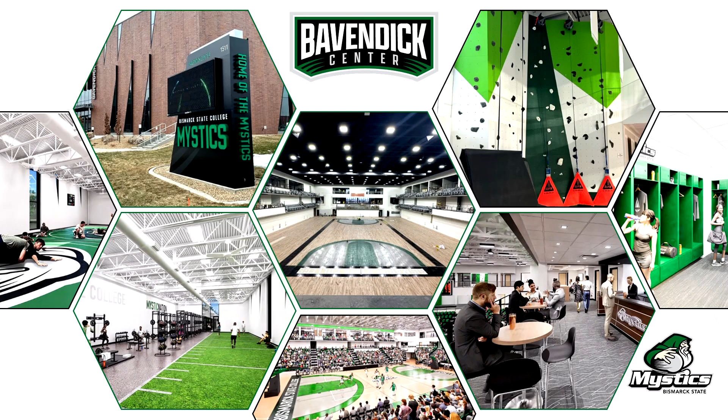So when you look at some of the images for this, and I hope this comes through to our viewers online well enough, some of these are renderings. What you see on the left side of the screen is the wrestling room, which will have two full-size wrestling mats in for the training.

Going counterclockwise, the facility for working out will have not only the weights and training equipment, but also a turf indoor track where athletes can do sprints and groundwork. That'll be something for our track athletes during indoor season, as weather can be an issue in this city and community, if you haven't heard that before.

At the six o'clock of this screen, you can see a rendition of what the arena will look like in a basketball setting. As I mentioned before, 2,000 seating. This is going to bring an environment that is not super large, but good for a lot of our events.

You hear a lot of times, especially out east in Fargo, when some of these events are held in large arenas, it just seems so big and so empty. So this is what we thought is a great size for a very energetic environment, but also we want to put good competition on that floor as well, with our student athletes competing at that highest level.

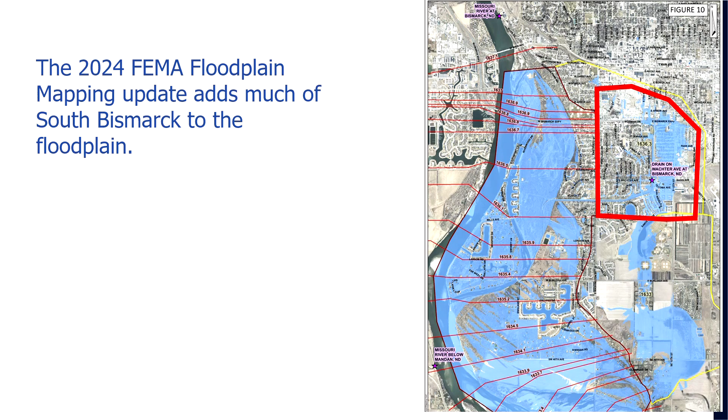So as a refresher, this is the crash course highlights, Cliff Notes version. You guys have seen it before, but just to refresh everyone's memory, in 2024 FEMA updated the floodplain mapping in South Bismarck in particular, but really throughout Bismarck. In South Bismarck, we added about 950 structures to the flood map.

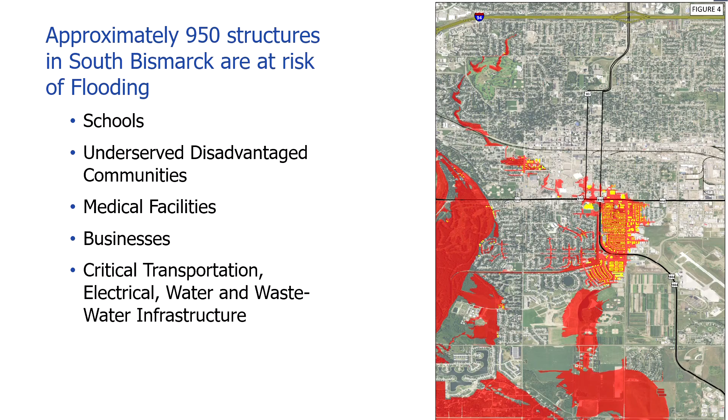And those structures, as you see here in the list, are a variety of types, some single-family homes, some schools, some infrastructure facilities. If that structure is backed by a federal mortgage, it is now required to pay flood insurance for that structure indefinitely, until the floodplain changes, either through an infrastructure improvement like we're trying to do, or through some other manner.

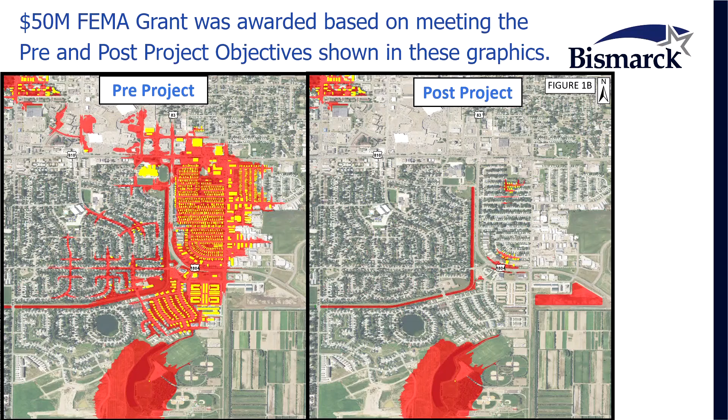Thankfully, the City of Bismarck was awarded a $50 million grant through FEMA to remove many of these properties from the floodplain through some of the improvements we noted. The picture on the left is what the floodplain looks like now, our effective floodplain as of 2024. The picture on the right is what we were shooting for when we applied for that grant money with FEMA. The initial alternative we developed was a concept that looked like this, with focuses on... let me get the highlighter here.

All of our improvements will have something on the South Washington gate structure where the South Bismarck drainage ditch crosses South Washington Street. This particular improvement had a stormwater pond on some airport property, interconnected to the storm sewer system to create effectively one large pond that would hold back water during a flood event, and then a pump station would pump that water out while the gate was closed.

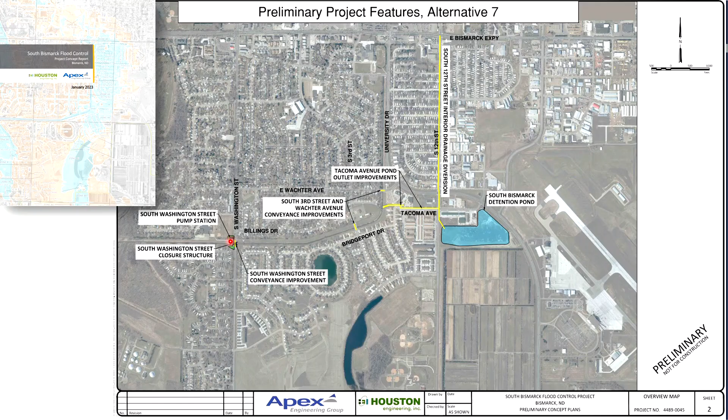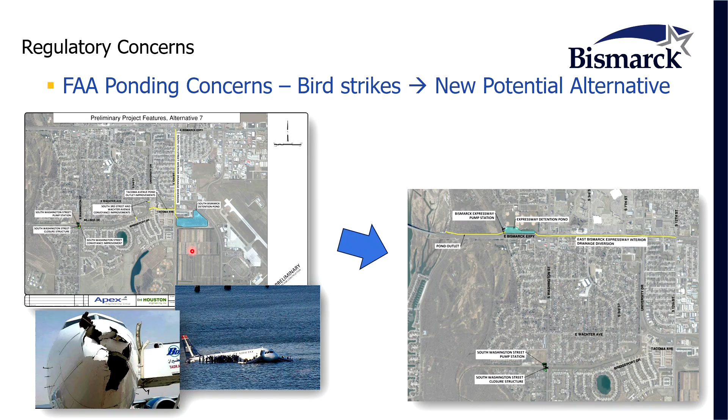As we continued our coordination with partners at the FAA and at the state level with the Bismarck Airport, there were concerns about bird strikes, or the ability for a bird to strike an airplane. So that's why we pivoted at that time to the Bismarck Expressway option, shown on the right hand of the screen. My next slide will get into more details about what that option entailed.

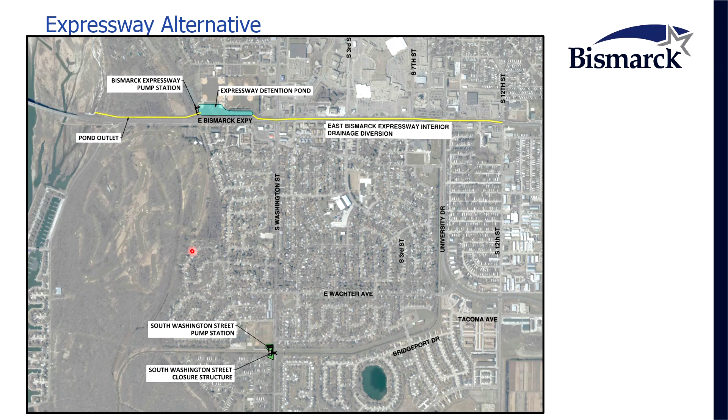This is pretty much the time at which we as the city started engaging with you as the park board, because we saw impacts would be in Clem Kelly. We initially looked at some ponds within Clem Kelly. Eventually we were able to come to an alternative that increased the sizes of the pipes along Expressway to minimize the impacts to Clem Kelly, but that all comes with a cost, so that cost was allocated there.

The last time I spoke to you would have been last April, where we said we found a solution that would still need some land from the Park District, but we'd be able to push much of that infrastructure to the south side of Park District property and have only a temporary impact during construction. Once that improvement is done, we'd be out of your hair and can put grass back on top of whatever that infrastructure looks like.

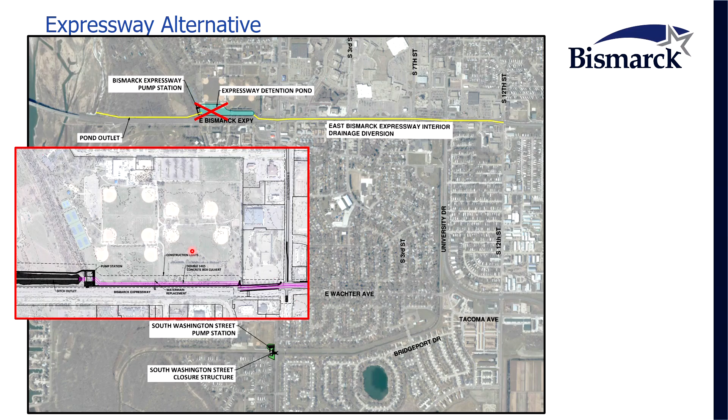So the activities since then would have been the final touches of the North Dakota legislative process. We worked with the North Dakota legislature to secure some funding for this improvement.

Since session ended, we've also had a lot of coordination, particularly with the North Dakota Department of Transportation. Bismarck Expressway is their corridor, so we started coordinating with them on what their expectations are if we put this large pipe or large conduit in their right-of-way, what they will need to do, and what rules they need to follow.

As we've had every conversation with someone, no one really said, here's something cheaper that we found. It's always more expensive—here's another thing we have to add to the budget. We take that into account with as many contingencies as we can when planning, but as we start eating into those contingencies, we're now just adding real costs on top of what we were planning for.

The same could be said for some of the adjacent private landowners. As we looked at ways to minimize costs and impacts to the traveling public, we could put some of those improvements on, let's say, the Kirkwood Mall parking lot or the Eide Ford parking lot, and those negotiations were good—everyone was willing to work with us. But when it comes to things like moving a sign, those things have costs. So things we might do to lessen the public impact might increase the project cost in order to do so.

Lastly, there's been a lot of coordination with our state and federal regulatory agencies, both from a regulatory perspective and a funding perspective—many doing double duty in that way. The North Dakota Department of Water Resources administers funding through the state, along with the State Water Commission, so we're working closely with their staff to understand what's eligible in their cost share formulas, as well as taking their feedback to heart in terms of how these alternatives fit into their funding systems.

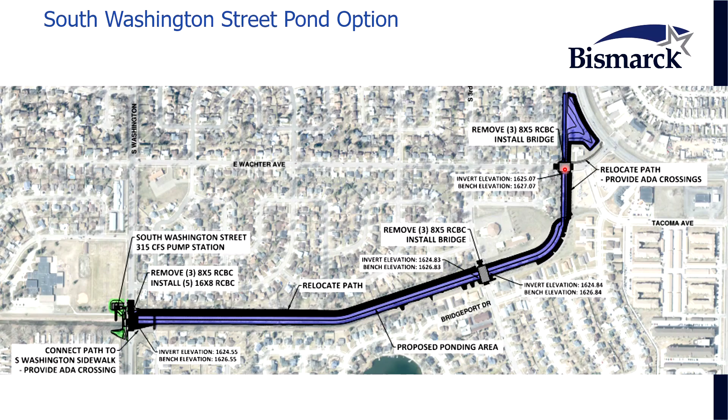When I say improving the capacity, I mean removing the box culverts that are there and replacing them with bridges, most likely, so that we can have one really large pond with great conveyance between all the reaches of this facility, which can then make that pump station as efficient as possible to move that water out of there.

Hopefully this comes across. I might zoom in to these ones here.

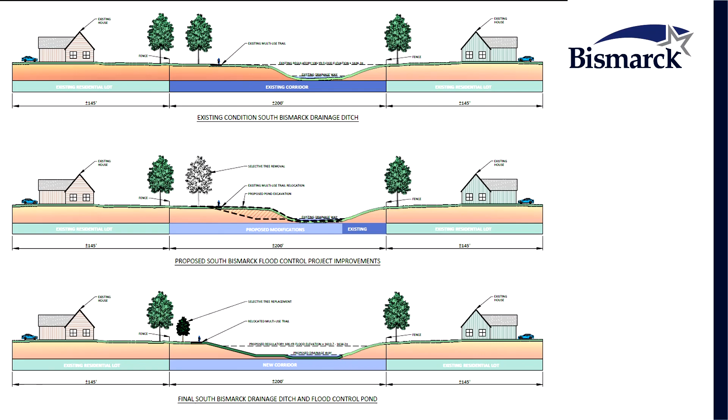So this next slide is a series of typical sections showing what that cross-section looks like of the existing corridor. We're showing that 200-foot wide piece of land that the city owns, some trees on the north side, the trail on the north side, and then the existing drainage way shown there, more so on the south side of the corridor.

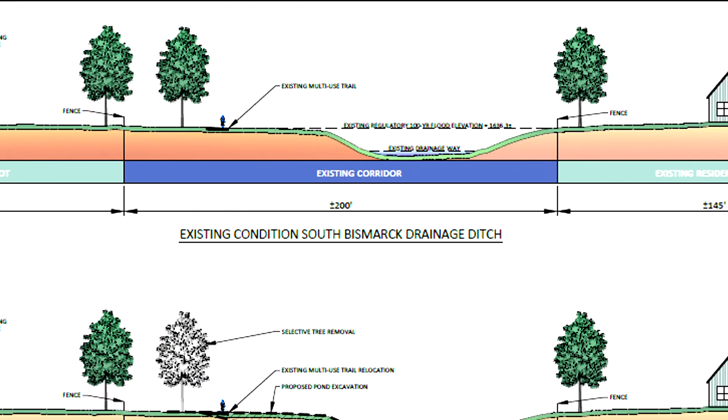What we'll find during our proposed conditions is we'll go out and excavate that north portion of it. We'll keep the bottom of the ditch the way it is. We're really not changing the elevations of anything. We're just adding capacity and storage, that's what we're trying to do with this improvement.

But in doing so, there would be trees that would be impacted, because we'll be looking at all of this in order to find that Goldilocks moment of impacts, of what we can take out without taking out a tree unnecessarily. There could be tree impacts as well as impacts to the existing multi-use trail that's there. That's another thing being considered, whether we would impact the trail or just grade right up to it. It's still something we're trying to figure out.

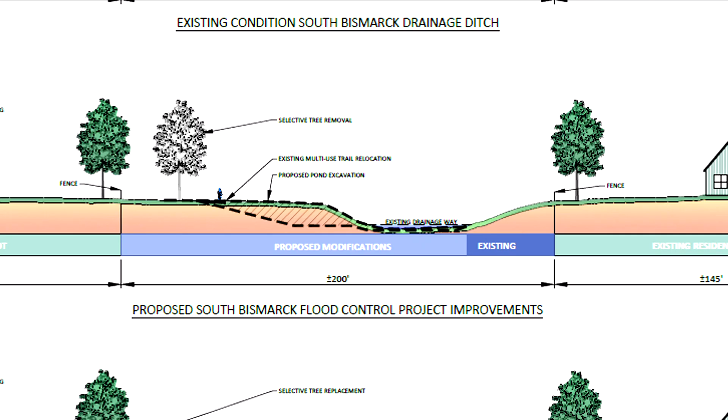If the trail was impacted, we would be restoring it, further north 5 feet, 10 feet, whatever it might be. And regardless of whether it's impacted or not during construction, it would likely be closed, even if the pavement itself is fine, since that'll be the middle of the construction zone during that time.

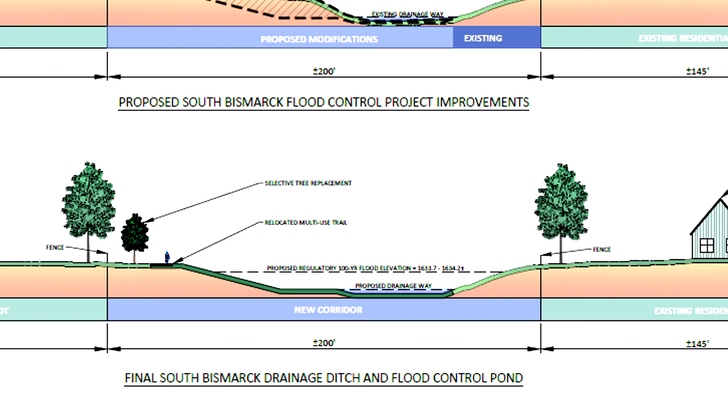And when we are done, we would expect something that looks like this. Still no right-of-way acquisition required from the adjacent properties, no impacts to any of the trees or anything outside of the city's property, but the trail will be reestablished. We put a tree in there, smaller this time around, because we recognize any mature tree that's out there, we're not going to be putting back a 40-foot cottonwood. We'll be putting back a smaller one that will grow to be that into the future. And we will have a lower regulatory floodplain by 2 or so feet with this improvement, which is what we're ultimately aiming for.

We would be replacing the triple cell with something that has 5 cells wide, so we're improving once again the conveyance through there, and putting a closure structure at this location so that when it is flooding and the river is at a high elevation, we're able to close those gates but not flood ourselves out from the interior. If we have a rain event during a flood stage, we're able to use these pumps to evacuate the water and pump it out from the ditch onto the high side or the river side during that event.

I do want to note a couple of comments, and this is where we'll focus on our impacts as it relates to parks facilities.

So we recognize that moving the north side of the embankment through here would have impacts to the existing trail or the bridge that crosses the creek, or the drainage ditch at that location. We are still evaluating what it would look like to replace that bridge outright, or modify the bridge just to add length to it so that it can stay in its location but have a longer span, because now that north side will need to expand another 30 feet or whatever that length might look like.

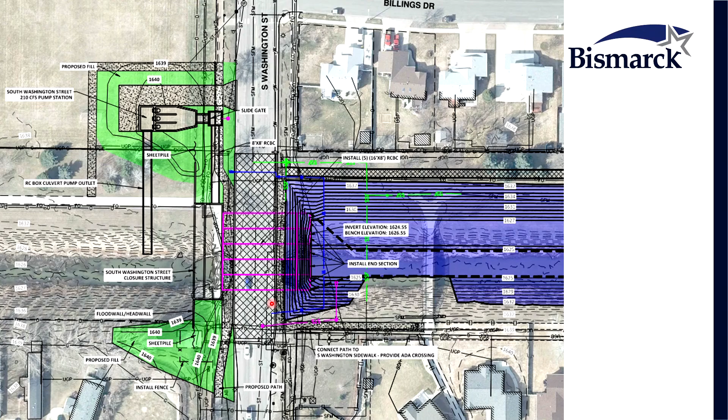Are there other locations, other drainage ways, other park district property, or even city property that could use a bridge of that length, that could be implemented or integrated somewhere else into the community so it's not just scrapped or salvaged that way. So that is something we'll continue to work with your park district staff on, potential options there, and I guess it'll be at their discretion, at your discretion, to figure out how much of those types of decisions come back to you as a board and how much are more at a staff level on some of these issues.

So my last slide on costs is that thankfully, with all these changes, we do see dramatic cost savings in doing it this way.

So we're not seeing the improvements. If you're driving on Bismarck Expressway, when we're looking at some of our models, the rain will go up to the same elevation that you see today. It might only be there for 1 hour instead of 2 hours.

So there'll still be an impact and a benefit to the public. But if we get done with this project and the public says it's still flooding on Expressway, we'll have a large amount of public information to explain what this project will do and won't do. Even though we might build this huge thing and get all these properties out of the floodplain, there's always a bigger event and always a stormwater event that would cause flooding in a street. That's just how Bismarck is, and that's how every community is. You can never build it big enough to take care of all your problems, or else it's financially consequential.

So our new cost estimates show we'd still see that $50 million from FEMA. We would be back to the state with now a $10 million, or a little north of $10 million, request per the typical funding patterns the state can employ at the next session, leaving a $20 million local cost for the city of Bismarck to fund locally.

So our next steps, at least the next couple months of work: we're working diligently now on our 30% design. Now that we know what we want to do and what it's going to look like, we can get into more of the nuts and bolts of those plan sets and plan sheets and better cost estimates. We're quantifying the impacts, similar to what I mentioned before, like the bridge impacts or the trail impacts, and then looking for ways to either avoid those impacts or mitigate them if they're unavoidable.